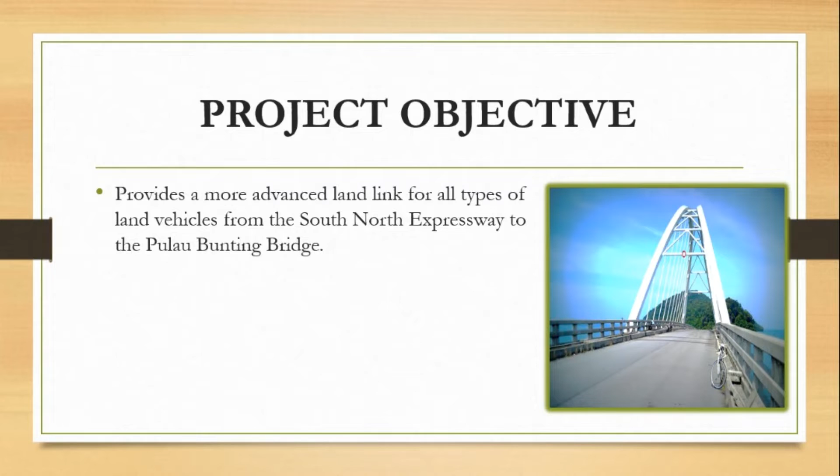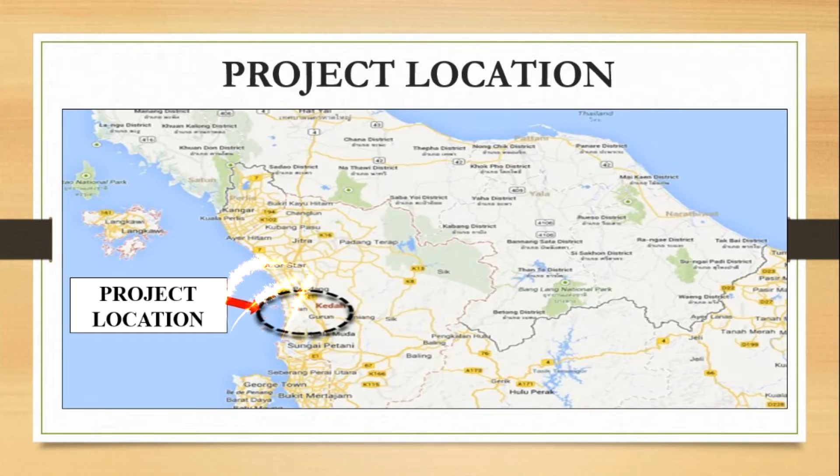The second objective is to create a complete road infrastructure for the development of Pulau Bunting Island. As you can see in this figure, most of the Yan district area is located along the coast, and it is also located beside the Gurun area, which is well known as a heavy industrial area. This characteristic has made Yan district the most suitable location to develop a new port for import-export purposes.

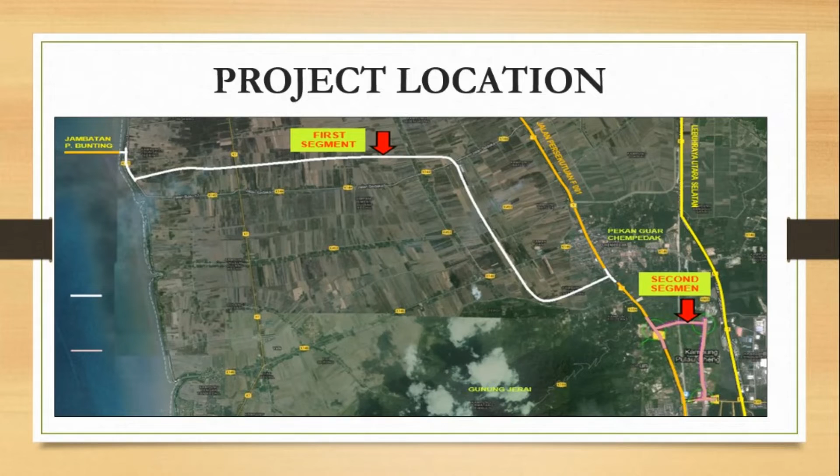This project involved a total of 18.2 kilometers of road construction divided into two segments, Segment 1 and Segment 2. As for the scope of work for this project, it consists of the construction of 14.9 km of new road with a single carriageway, 2 lanes.

This complies with the JKR standard requirement of R5, which includes drainage, pavement, road furniture and more. The new road is for the first segment.

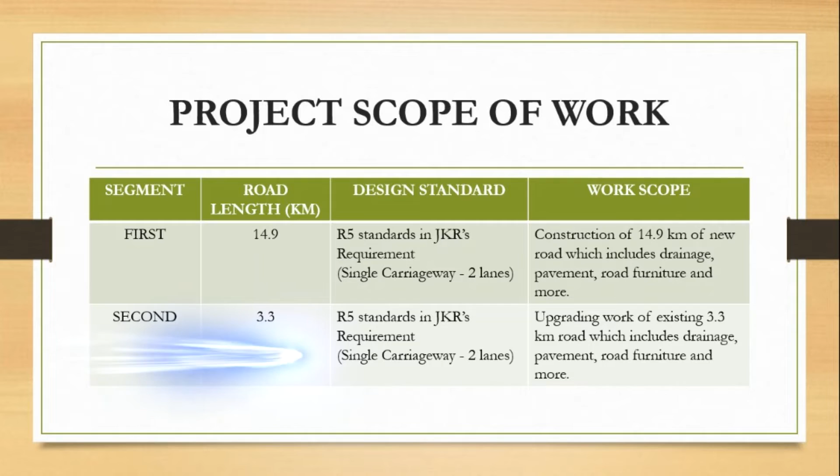For the second segment, it consists of upgrading work of the existing 3.3 km road with single carriageway, 2 lanes, according to R5 standards in JKR requirements, which include drainage, pavement, road furniture and more.

Other than that, the scope of work involved in this construction and upgrading work includes land acquisition, earthwork and geotechnical work, and environmental quality monitoring work in the construction area throughout the construction stage.

This figure shows the illustration of the typical cross-section of the road construction after the completion of the new road.

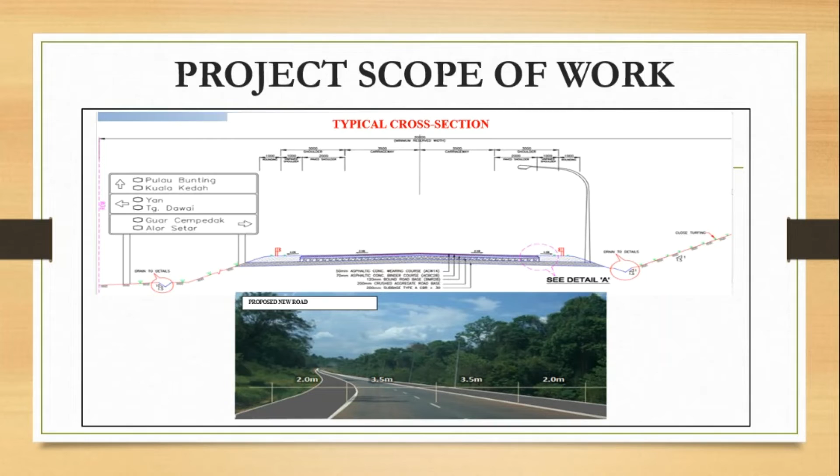There are various types of risks that may arise throughout the project. Usually, project risk can be categorized according to the source that the project experiences or faces during construction. The Project Risk Management Manual by Open University Malaysia has identified and categorized types of risk into 14 types or categories.

The first type of risk is quality, technical or performance risk. The second is project management risk. The third is organizational risk. The fourth is external risk. The fifth is schedule risk.

The sixth risk is requirement risk. The seventh is product or technology risk. Number 8 is customer risk. Number 9 is human or contractor risk. The 10th is environmental, safety and health risk.

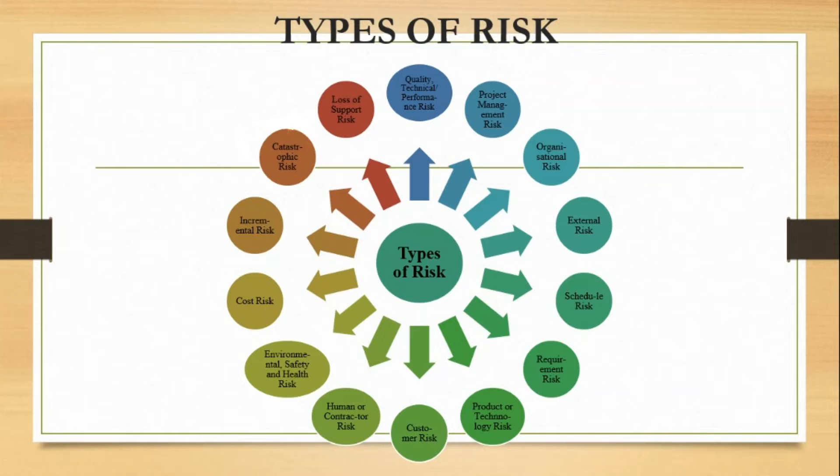Number 11 is cost risk. The 12th is incremental risk. Last but not least is catastrophic risk, and the final category is loss of support risk.

The second risk is the land acquisition process. This type of risk is categorized as a schedule risk. The first segment of the project is mostly located on private land, therefore land acquisition is required. Usually, this process takes up to an average of 338 days.

The third risk is land acquisition costs. This risk is correlated with the previous land acquisition process and was categorized as both schedule and cost risk.

The fourth specific risk for this project is delay in validation of scope of work by the utility provider. This risk was categorized as an external risk and a catastrophic risk.

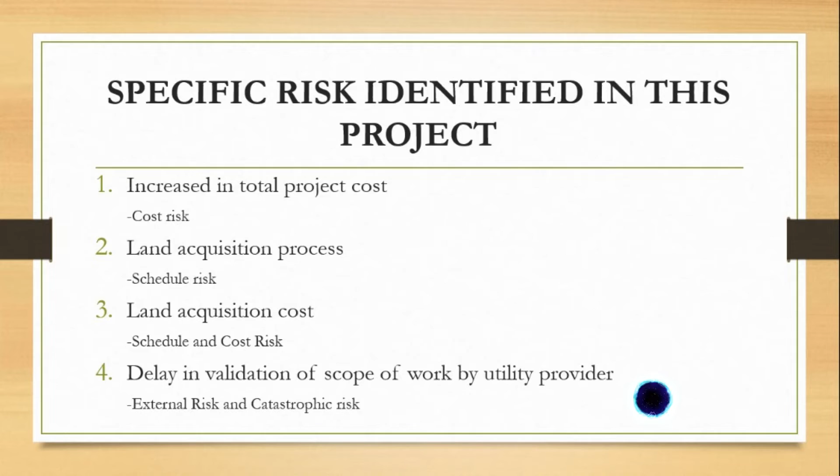The fifth risk is JKKK application that could delay the construction work. This risk is categorized as an incremental risk and schedule risk since it has potential impact on the society and could cause delay to the project.

The sixth risk is requests for additional pipe covered location by MADA. This risk was categorized as a requirement risk and a customer risk.

The seventh specific risk is soft ground that could cause machines to sink in the paddy field. This risk was categorized as a catastrophic risk and also an environmental, safety and health risk since it could cause injuries or fatalities to the machinery operator.

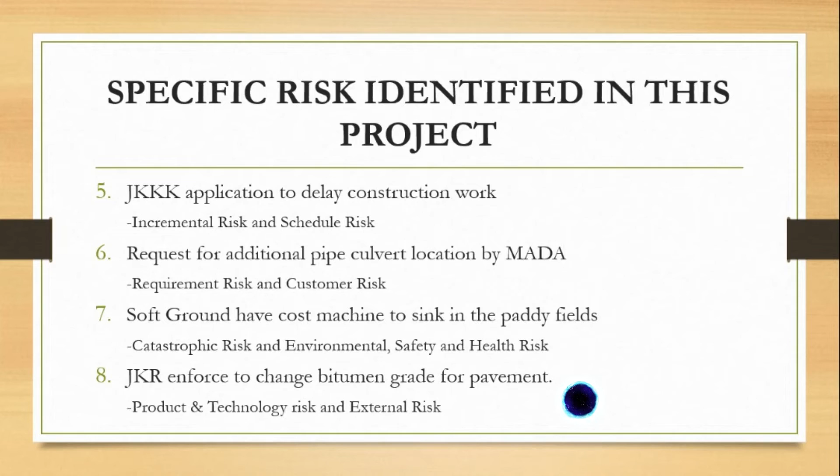The last risk is JKR being forced to change the bitumen grade for pavement. This was categorized as a product and technology risk since a new product is being used in the construction where the supplier for this product is limited, and also categorized as an external risk because the government has enforced a new law during the construction.

In order to overcome all of the specific risks identified, a risk response plan should be developed. A risk response is a process that involves developing available options, selecting suitable strategies, and taking suitable action to treat project risks or specific risks identified in the project.

There are 5 factors that need to be taken care of when designing a risk response plan. The first factor is the resource management plan. The second factor is total cost and cost baseline. The third factor is residual risk.

Residual risks are also known as leftover risks, and sometimes these risks are acceptable and tolerable up to a certain degree. The next factor is secondary risks, which are risks that arise as a direct outcome of implementing the risk response plan.

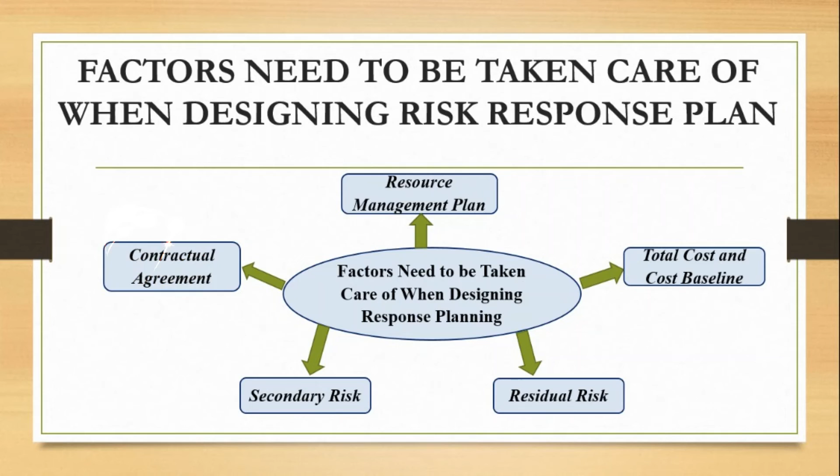Contractual agreement is a document that contains information about each party's involvement in the project. It also explains every party's responsibility for the project, and each risk can be assigned to the correct party to resolve it. Proper documentation of identified risks is essential because risks from previous cases or projects are likely to be used as a reference for finding possible solutions for current project risks.

There are 3 documentation phases that are used: historical database, current project database, and post-project review and archive. A historical database is defined as the record of data from previous projects with similar risks and conditions to the current project.

A current project database is the recording or documentation of an ongoing project that is during the implementation process and currently facing all of the risks that had been identified or anticipated earlier.

Lastly, project post-review and archive. Project post-review could be defined as making an evaluation on the project in order to determine its current state, or whether the project is performing as expected or not.

Consistent collecting, compiling, and recording of data is crucial for an ongoing project as it will ensure more accurate data is recorded and will reduce the cost and time consumed in the documentation process.